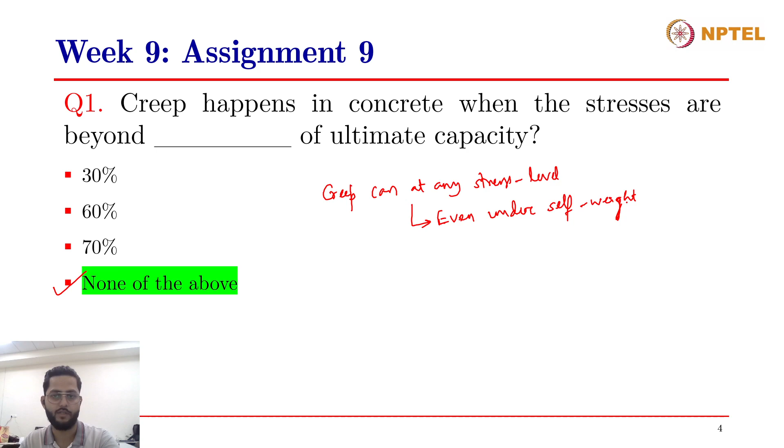The second question was an assertion and reasoning type question. The assertion is that concrete shows less creep after removal of all the evaporable water from it. The reason given is that creep in concrete is related to the movement of adsorbed or interlayer water from larger to narrower pores. You have to answer if the assertion is correct, if the reason is correct, and if the reason is the correct explanation to the assertion.

What is evaporable water? Can anybody tell me what is evaporable water? Evaporable water is that water which is freely moving within the pores of concrete and can be evaporated out when the concrete is heated at 100 degrees Celsius or so.

So when concrete is heated up to 105 degrees Celsius, like we do in an oven, evaporable water gets lost, right? So the other water that will be present is only the non-evaporable water. Non-evaporable water will be chemically bound or adsorbed onto the surfaces of different phases, right?

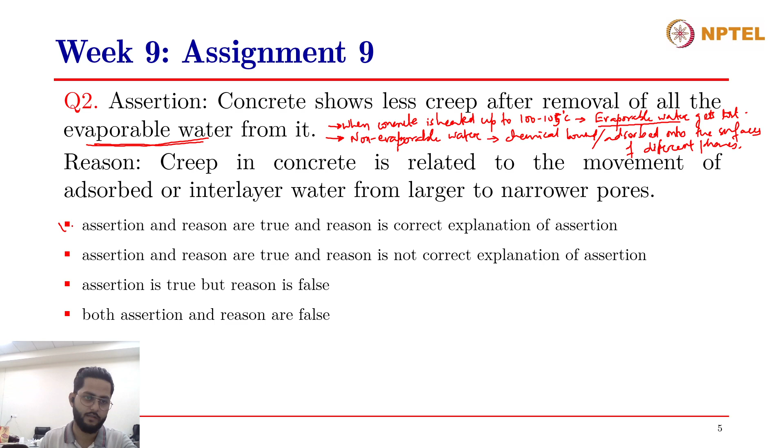Is the assertion true? Yeah, and the reason true? Are both the assertion and the reason true? The answer is the first option. Yes, this is actually the correct assertion.

When concrete creep occurs, we know that creep occurs in concrete due to the movement of moisture inside it, the water and pore water. So when you remove the evaporable water from concrete, the creep also reduces. And the reason given is again due to the movement of water.

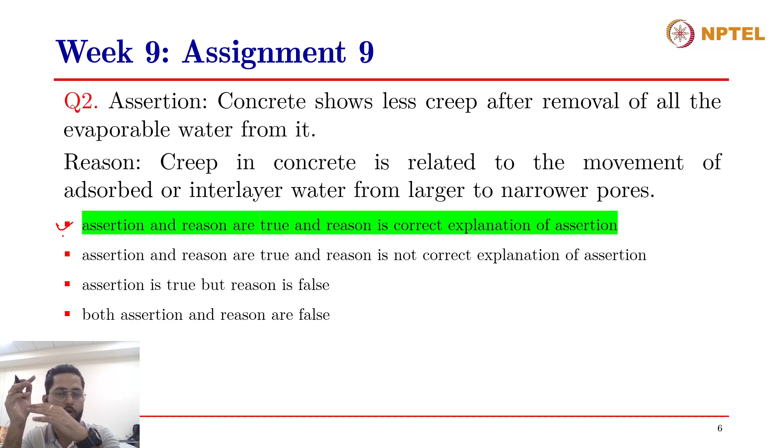Creep in concrete is related to the movement of adsorbed or interlayer water from larger to narrower pores. So when you remove water, you remove it from the larger pores first since they have the least tensile force. Once that water is lost, there's none left to move from a larger to a smaller pore, which is what results in creep. So removing the water may cause the concrete to shrink a bit, and since it has already shrunken, the possibility of creep occurring will reduce.

So that's the correct reason too, because creep occurs due to the movement of interlayer water from larger to narrower pores, and when you remove that evaporable water, creep will reduce. So option 1 is the correct answer.

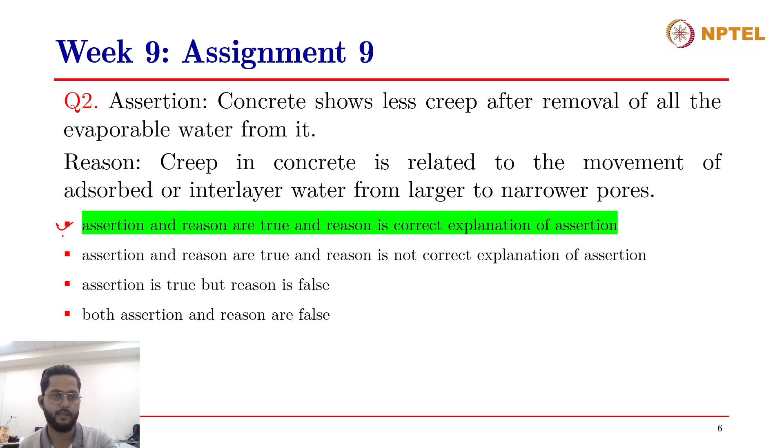Moving on to the third question: which of the below are correctly matched? They have given a table with factors affecting creep and their effect, whether it increases or decreases creep. There are four factors: decrease in aggregate modulus of elasticity increases creep, increase in water to cement ratio decreases creep, increase in temperature increases creep, and increase in load application age decreases creep. Which of these have been correctly matched?

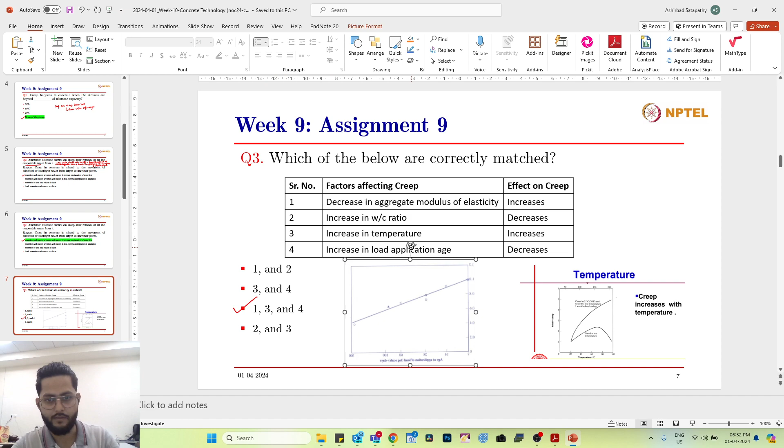I'll just - I might have turned this upside down. There's some issue with this picture. I don't know how it got flipped. Somehow it got flipped actually. Rotation.

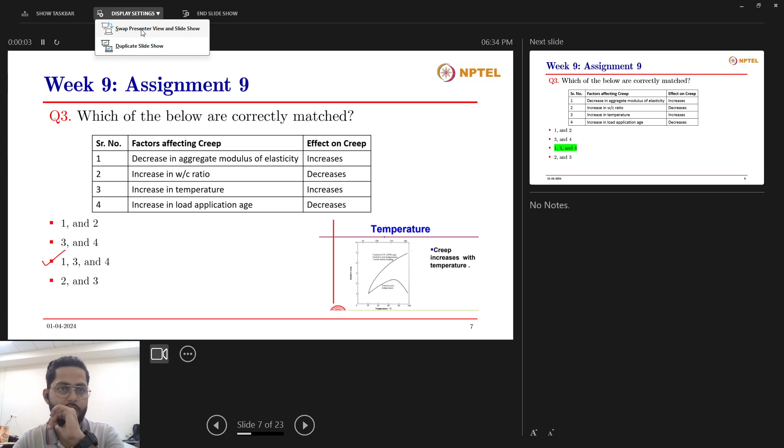Let's go over all these factors one by one. Decrease in aggregate modulus of elasticity. Before we discuss this factor, we need to know what part of concrete undergoes creep - is it the cement paste or the aggregates? It has already been discussed in the lecture that it is only the cement paste part, and more importantly, research has shown that the CSH gel present in the cement paste, the cement hydration product, is responsible for creep in concrete. So it is only the cement paste part that undergoes creep in concrete, not the aggregates.

Therefore, when you increase the modulus of elasticity of aggregates, the load that they can share from the concrete will also increase. So the load shared by the aggregates also gets increased, and therefore lesser load is being taken up by the cement paste. We have seen that when the stress is less, the creep is also less. So you want aggregates with higher modulus of elasticity so that your creep will also decrease in concrete.

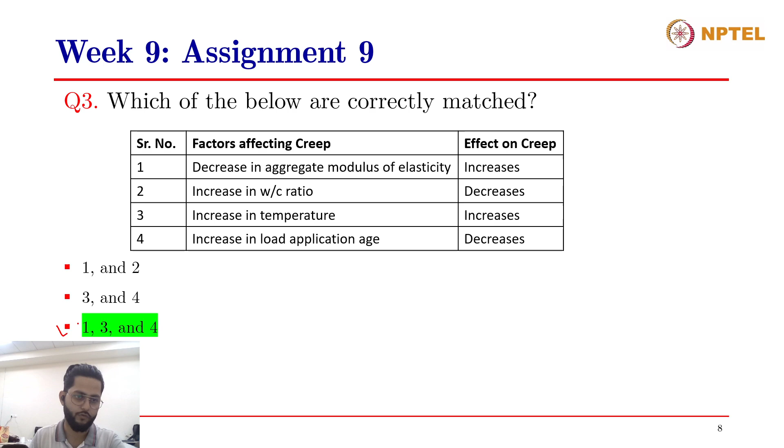So the correct answer to this question is 1, 3, and 4. I hope that was clear to you.

Moving on to the fourth question, again an assertion and reasoning type question. The assertion here is: in statically indeterminate structures, creep relieves stress concentration.

The highlight over here is statically indeterminate structures. The creep relieves stress concentration. As the members are restrained, relaxation happens, which in turn increases the shrinkage stresses.

So you have to say if the assertion is true and the reason is true, and if the reason is the correct explanation of the assertion, which is the correct answer.

What is a statically indeterminate structure? Can somebody answer? This is a part of your structural analysis in the bachelor's course of civil engineering. What is a statically indeterminate structure?

And then we'll discuss about stress concentration and so on. So before going over what creep does to statically indeterminate structures, let's first discuss what is a statically indeterminate structure. Yes, can somebody answer?

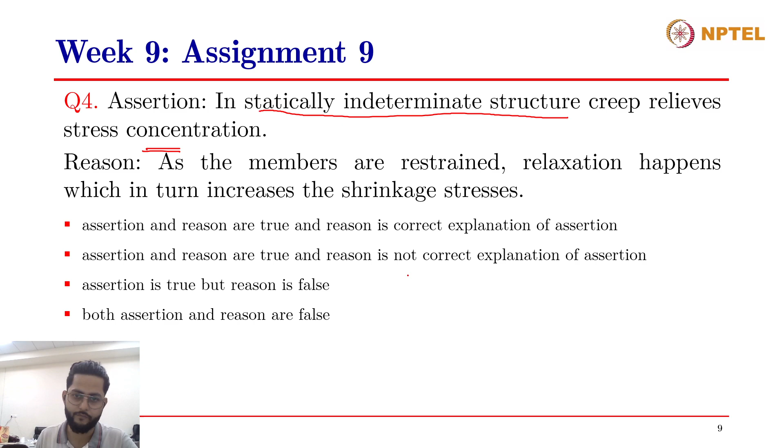So let us say, now that we have established that a fixed beam is a statically indeterminate structure, when you make your structures, let us say this is a column, and then this is a beam, and then there is another column, and so on. In your house, this joint is a fixed joint.

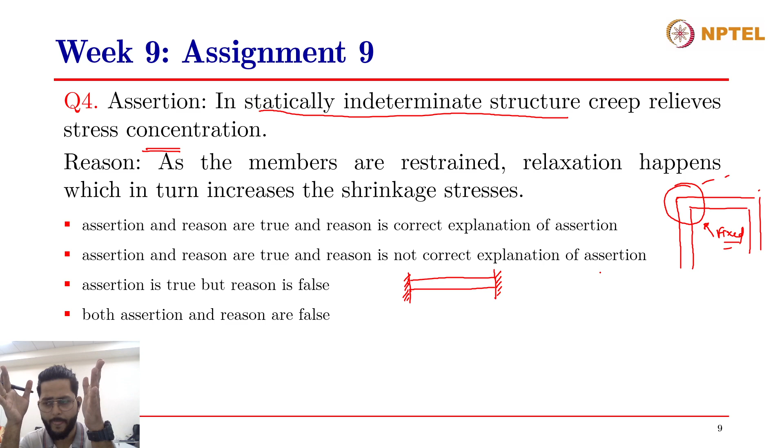In reality, there are no simply supported beams really. Only in the olden days, with load-bearing structures, where you support the beam on walls, is it a simply supported beam. But when you're making monolithic structures, when you're casting the columns along with the beams and slabs, then the joint is a fixed joint, and it acts similar to a fixed beam.

Now, when you have a fixed beam and you apply the vertical load, it will deform in a manner a little different from a simply supported beam. The curvature at the ends will be flat, and this curvature is always maintained at 90 degrees. So the beam supports are not allowed to move relatively to each other. If I just zoom this part in, even when it is unloaded as compared to when it is loaded, the angle between the support and the beam at the beam ends is maintained at 90 degrees always.

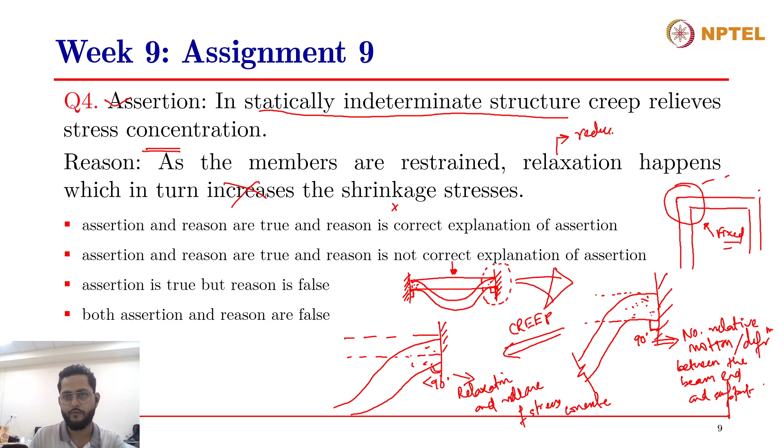The second statement was, as the members are restrained, relaxation happens, which in turn increases shrinkage stresses. It doesn't increase the stresses, it decreases them. This isn't about shrinkage, but since the first assertion was about creep, this shouldn't be related to shrinkage either way, it won't increase the stresses. Relaxation always reduces stresses, right? That's why it's named relaxation, it makes the member relaxed. Relaxation reduces stress, not increases it. That is exactly why the reason is false and the assertion is true. So the correct answer is the third option. I hope that was clear.

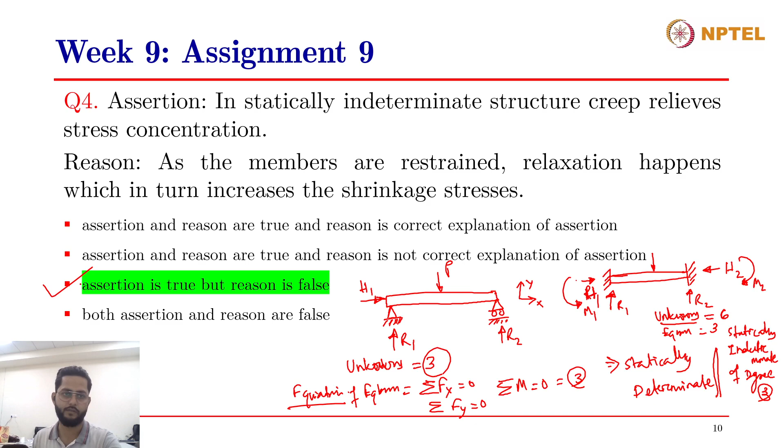Yes, can someone answer this question? Abdul, Kailash, Pavitra, can you answer this question? Which of the given statements are true and why?

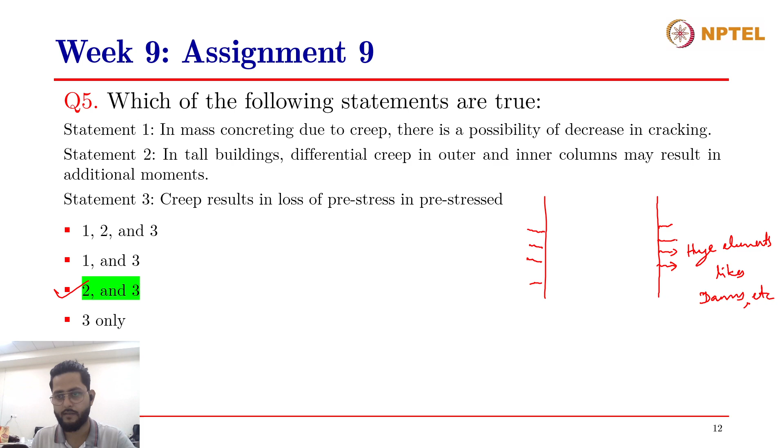What happens in mass concreting is, by mass concreting we mean very huge elements, like dams, dam structures, etc. So when the concrete elements are too huge, the surface is exposed to atmosphere, and therefore it can release the heat at the surface. Now, where does this heat come from?

Due to the hydration reactions. We know that hydration reactions are exothermic, they release heat when the cement gets hydrated. Now, the surface is exposed to atmosphere, and therefore it is able to release that heat onto the atmosphere. However, the core is at a higher temperature. So there is a thermal gradient from the core, which has a higher temperature, to the surface, which is at a lower temperature.

Now, when heat is getting released, the surface is getting cooled down, and therefore it wants to shrink. We know that increase in temperature causes expansion, and decrease in temperature causes shrinkage, it makes it contract. So due to this contraction from heat release, the surface is trying to shrink, while the core is still at a higher temperature and wants to expand. So there is tension at the core, and compression at the surface.

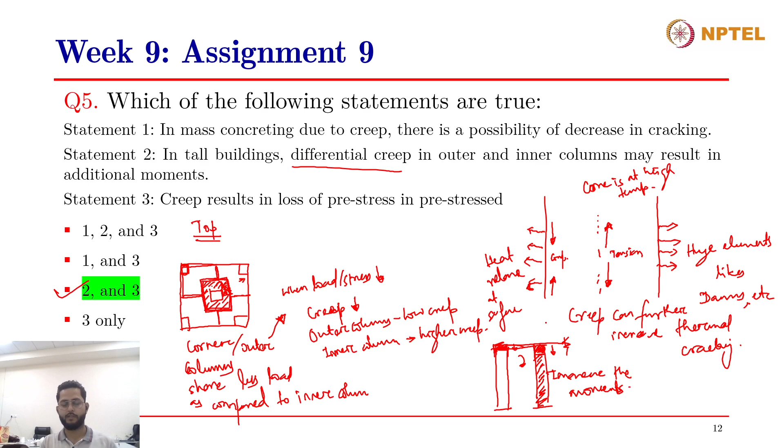That will induce curvature in the beams, which will further increase the moments - because due to the differential creep in the columns, there will be differential deformation within the columns and beams, and therefore additional moments get generated. So this happens in tall buildings: outer and inner columns undergo different creep, which induces additional moments.

So statement 2 is correct. And finally, creep results in loss of pre-stress in pre-stressed structures - this we have already studied in the lecture as well.

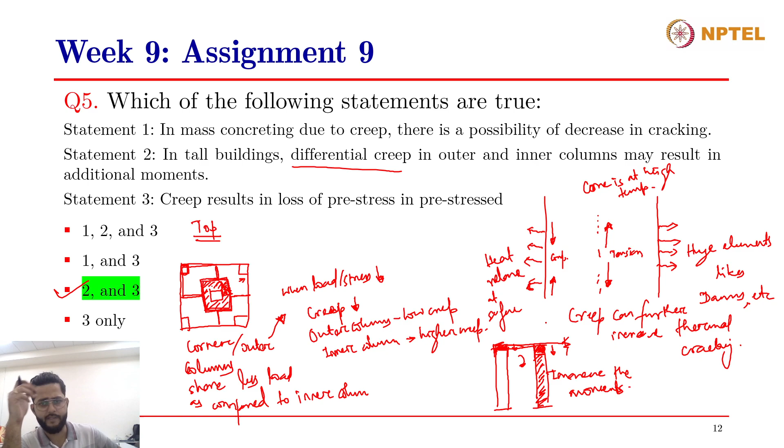In pre-stressed structures, due to continued application of pre-stress, the concrete or steel undergoes creep, and due to that the applied pre-stress is lost. So creep is one of the different kinds of losses of pre-stress in pre-stressed structures, and when we design such a structure, we account for the loss due to creep, designing to a higher load than we actually want, because some stress will be lost due to creep and other factors like slippage.

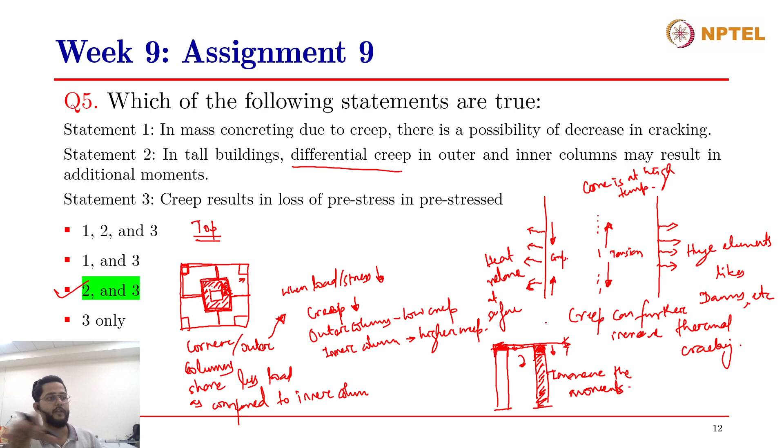So there are many factors affecting loss of pre-stress in pre-stressed structures, and creep is one of them. We apply an additional factor of safety to account for these losses. So statement 2 and statement 3 are the correct answers.

Moving on to the sixth question: drying shrinkage is completely reversible. The assertion is that drying shrinkage is completely reversible, and the reason given is that after drying, if we pour water again on the member, the water will be absorbed and shrinkage will be reversed. You have to say if the assertion is true, the reason is true, and whether the reason correctly explains the assertion. Can somebody answer, please?

Is drying shrinkage completely reversible? After drying, if we pour water again on the member, the water will be absorbed and the shrinkage will be reversed.

What is the correct answer to this question? Yes, anyone?

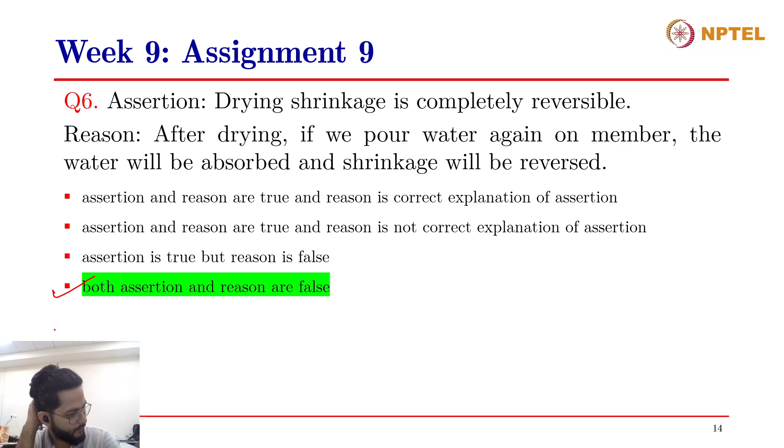In this case, both are false actually. This statement that drying shrinkage is completely reversible is wrong. And the statement that after drying, if we pour water again on the member, the water will be absorbed and shrinkage will be reversed, is also not possible. Once shrinkage has happened and the member has dried, it won't come back again. That means both are wrong.

Right, right, thank you Abdul. Yeah, that is actually the correct answer. Both of these statements are wrong. Drying shrinkage is not completely reversible.

When drying shrinkage occurs, and when you pour water or add an external source of water to the concrete specimens, it can undergo somewhat of a swelling and can compensate somewhat for the shrinkage that has already occurred, but it cannot completely recover all the shrinkage. It can only recover a part of the shrinkage that occurred in the concrete, and therefore drying shrinkage is not completely reversible. It is reversible only to a certain degree. Only some part of the shrinkage or deformation that the concrete has undergone will be recovered, but not all the strain or deformation will be recovered.

So both the statements are wrong.

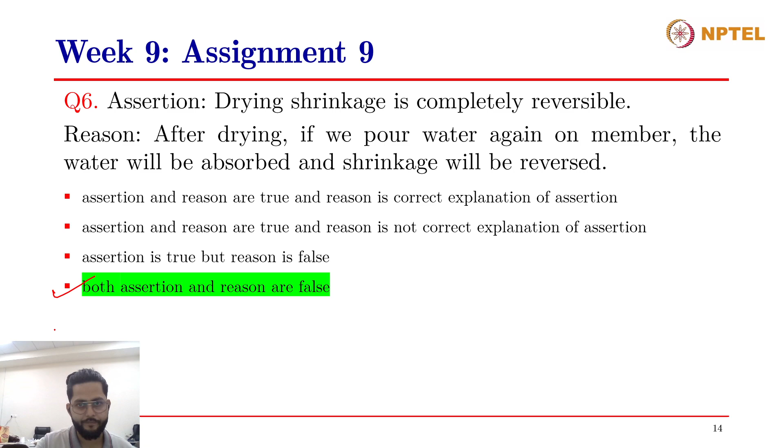Moving on to the seventh question: which of the following increase with increase in the volume to surface area ratio? Is it creep, shrinkage, both creep and shrinkage, or neither creep nor shrinkage? Which of the following increase with the increase in volume to surface area ratio?

Yes, can someone answer? Sir, display doesn't come, question 7 displayed doesn't come. Oh, you can't see my screen now? Question 6 is still there. 7 not come. Okay, all right, I'll just share my screen again. Yes, okay sir, yeah you can see it now. Which of the following increase with increase in the volume to surface area ratio? Is it creep, shrinkage, both creep and shrinkage, neither creep nor shrinkage? Can you answer?

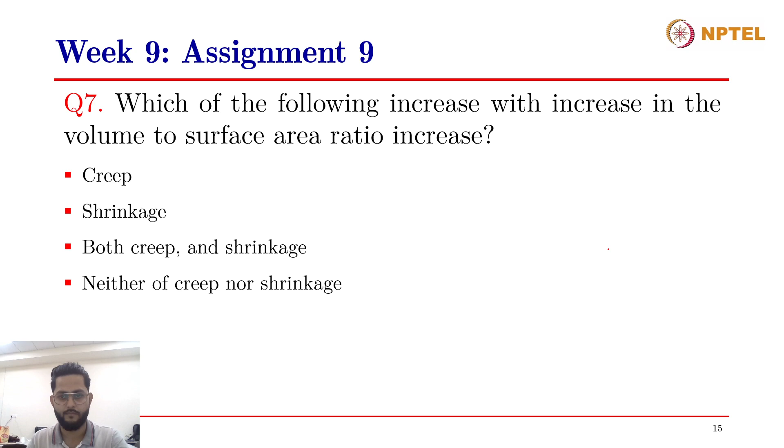So both creep and shrinkage will decrease when you increase the volume to surface area ratio, right? So the correct answer to this question will be neither creep nor shrinkage. I have taken these graphs from the lecture slides, and you can see that this is for creep - as you increase the volume to surface area ratio, the creep reduces.

And this is for shrinkage, ultimate shrinkage, and you see that as you increase the volume to surface area ratio, the ultimate shrinkage also reduces. So these factors don't increase, rather they decrease. The creep and shrinkage decrease with the increase in volume to surface area ratio. Alright.

If you want, I can just mention it over here. So as volume increases, volume to surface area ratio increases, porosity and pore size reduce, leading to less moisture movement, which reduces, and creep therefore reduces, right?

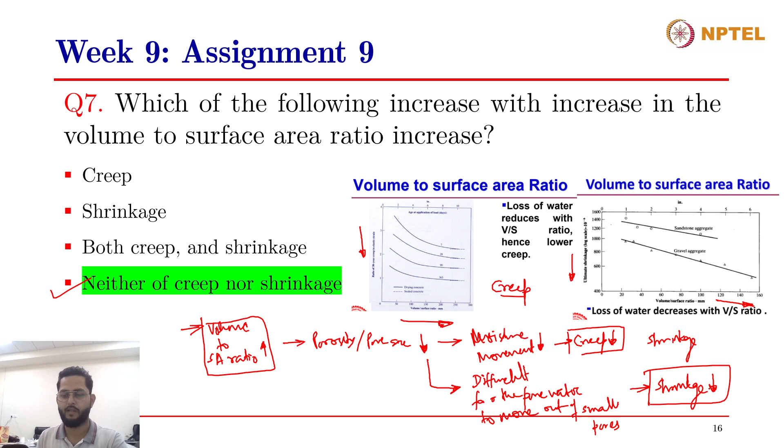Moving on to the eighth question. As evaporation happens, water moves from dash pores to dash pores: larger to smaller, smaller to larger, water does not move, or depends on other factors. As evaporation occurs, water moves from dash pores to dash pores.

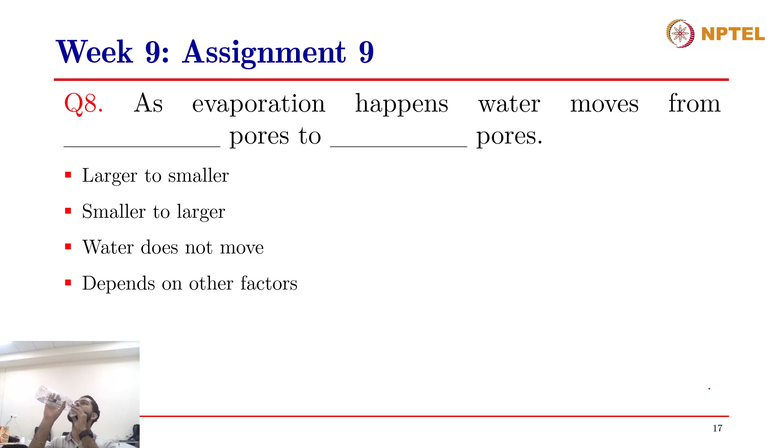It is water moves from larger to smaller. Right, that's the correct answer.

When the water evaporates, it is easier for the water present in the larger pores to move out faster than the water in smaller pores, because when the pore size is large, the capillary forces within the pores are smaller. These capillary forces hold back the water and try to keep it within the pore. When the pore size is larger and capillary forces are smaller, it is easier for the water to move out, but when the pore size is smaller, the capillary forces are larger and it is harder for the water to move out.

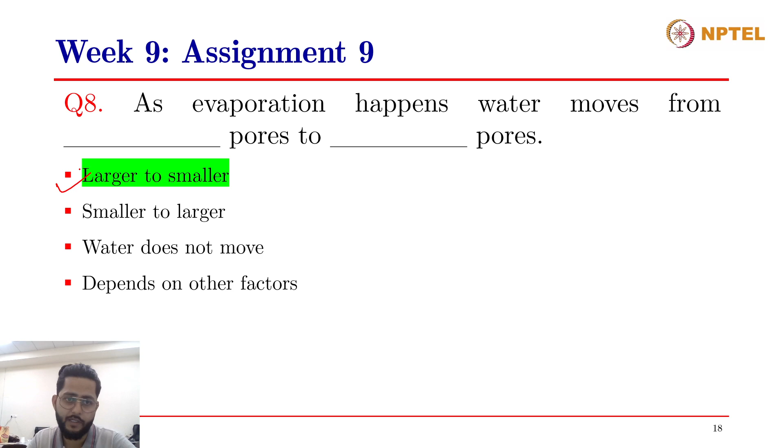So what happens is, when evaporation takes place, first the water from the larger pores moves to the smaller pores, and the remaining water in the larger pores gets evaporated first. Once all the water in the larger pores has evaporated, the water from the smaller pores now has to come out and evaporate. So as you increase the temperature, first the water from the larger pores evaporates, and then the water that moved to the smaller pores starts to evaporate at a higher temperature. So this is the right answer to the question.

Moving on to the ninth question: which of the below are correctly matched? Decrease in aggregate modulus of elasticity increases the shrinkage. Increase in volume of aggregates decreases the shrinkage. Increase in curing period decreases the shrinkage. Decrease in relative humidity decreases the shrinkage. Which of these are correctly matched, and how?

I've already pasted the few graphs on the right side, but that will be a hint to you. So you can go ahead and look at them and tell me the answer. Or if you can explain also, that will be cool. How do these factors affect the shrinkage: the aggregates modulus of elasticity, volume of aggregates, curing period of the concrete, relative humidity? Yes, anyone?

Decrease in aggregate modulus of elasticity increases shrinkage. Increase in volume of aggregate decreases it, and increase in curing period decreases it, because the moisture is maintained during the curing period, that's why the shrinkage decreases. If it is exposed to higher temperature, there is more chance for shrinkage during the curing period. That's why most of the time, once we pour concrete, we maintain curing for at least 7 to 14 days, even moistening the surface. So a clear increase in curing period definitely decreases shrinkage. That is mainly because of temperature control and the ambient temperature.

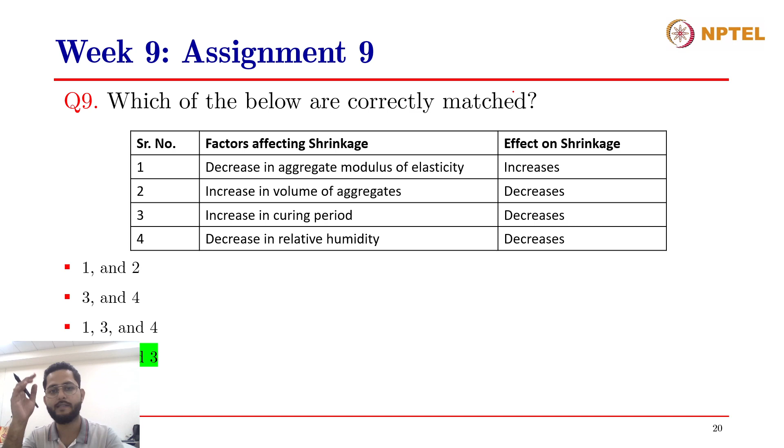We'll go about all the factors one by one. Decrease in aggregate modulus of elasticity - again, as I mentioned in the previous slides about shrinkage, when you decrease the modulus of elasticity of aggregates, you are decreasing the load that the aggregates can take, and therefore the load on the paste increases. When the load on the paste increases, that creates creep, increasing the creep in the concrete.

A decrease in the modulus of elasticity of aggregates increases shrinkage. When you increase the modulus of elasticity of aggregates, the shrinkage reduces.

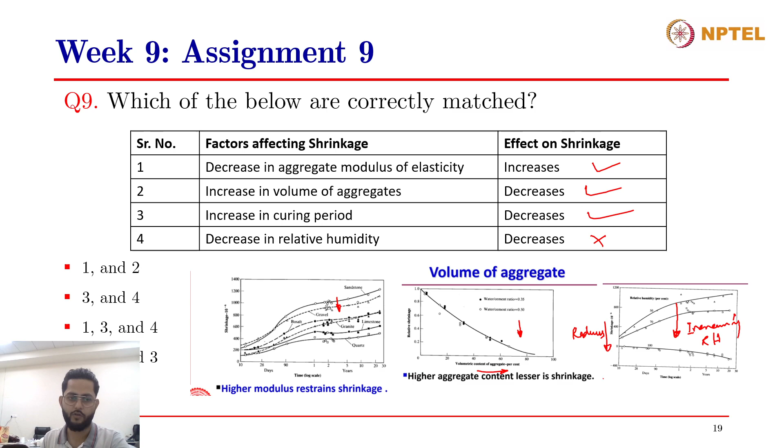Can anyone answer this question?

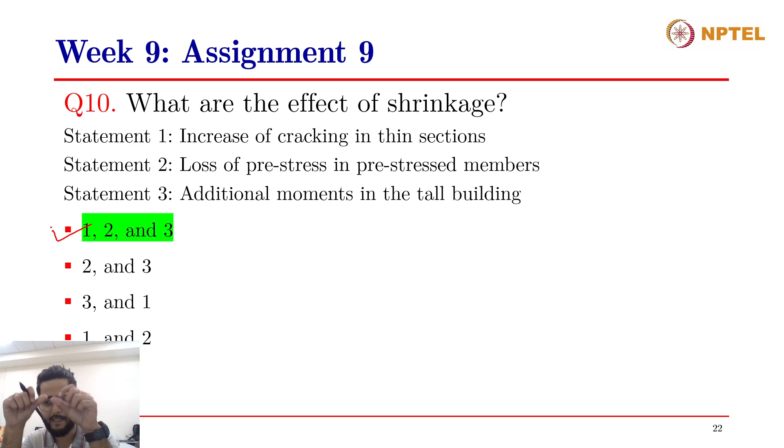It is similar to creep. When you apply a pre-stress or tensile stress onto the steel, that tensile stress is transferred onto the pre-stressed concrete as a compressive stress, inducing compression inside the concrete. Due to shrinkage, tensile forces are induced within the concrete, which compensate for some of the compression coming from the pre-stress. So yes, there will be loss of pre-stress due to shrinkage in pre-stressed members.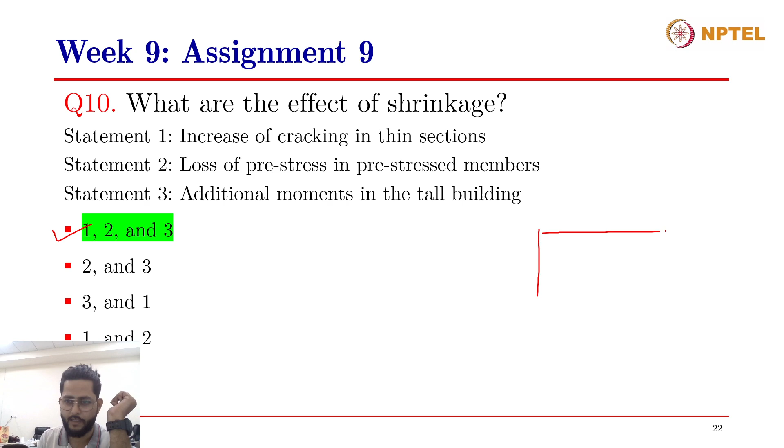I'll draw this diagram so it makes more sense. Let's say this is a pre-stressed concrete member, and this is a pre-stressing tendon, applied with a tensile load. Due to this tensile load, there will be compression within the concrete. But due to shrinkage, there will again be tension in the concrete, not in the steel, but tension in the concrete.

So now the effective pre-stress will be C minus T-dash, while the applied pre-stress should have been C. So this got reduced. The applied pre-stress is C, while due to shrinkage there will be some induced tension, and therefore the compression coming from the pre-stress will be reduced. So the effective pre-stress gets reduced, meaning there is a loss of pre-stress in pre-stressed members due to shrinkage.

So that is again a correct statement. And as we discussed in the case of creep as well, there will be additional moments in tall buildings because due to shrinkage, there will be some subsidence in the concrete members. Let's say we have cast two columns.

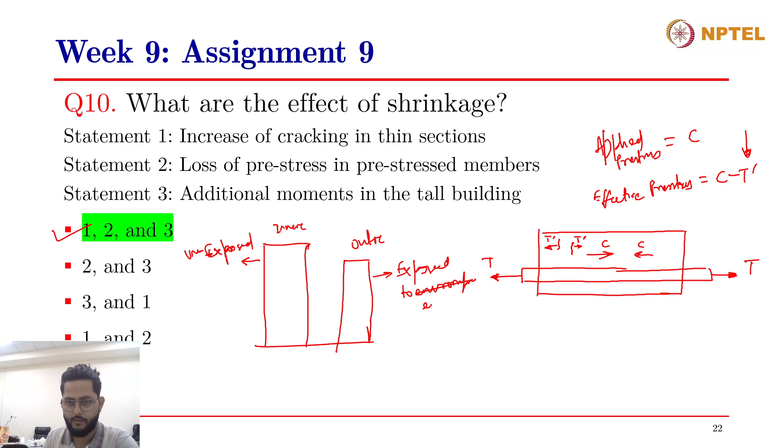Due to shrinkage, the outer columns are exposed... sorry, this is the inner column, unexposed, and this is the outer column, exposed to the environment. So as temperature increases,

thermal shrinkage or drying shrinkage might occur. Drying shrinkage will be higher in outer columns and lower in inner columns. So there will be higher subsidence in the outer columns compared to inner columns.

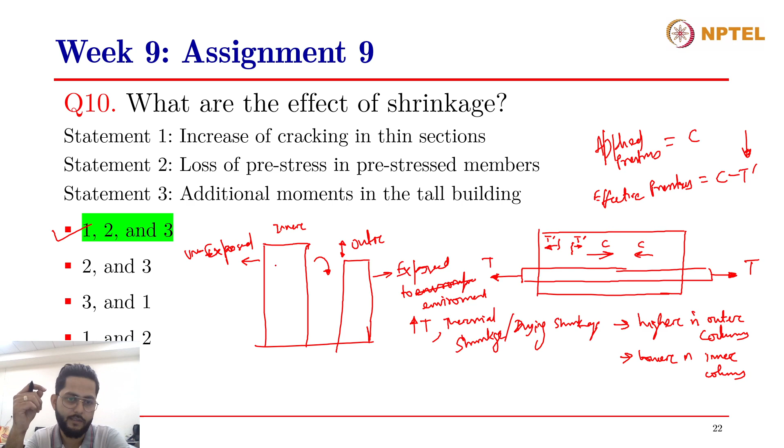Therefore an additional moment will be acted upon in the building due to shrinkage. Outer columns are exposed to the environment and undergo a higher temperature change, and therefore a higher degree of drying shrinkage, inducing higher subsidence or deformation in these outer columns, adding an additional moment in tall buildings. So the correct answer is that all three statements are true.